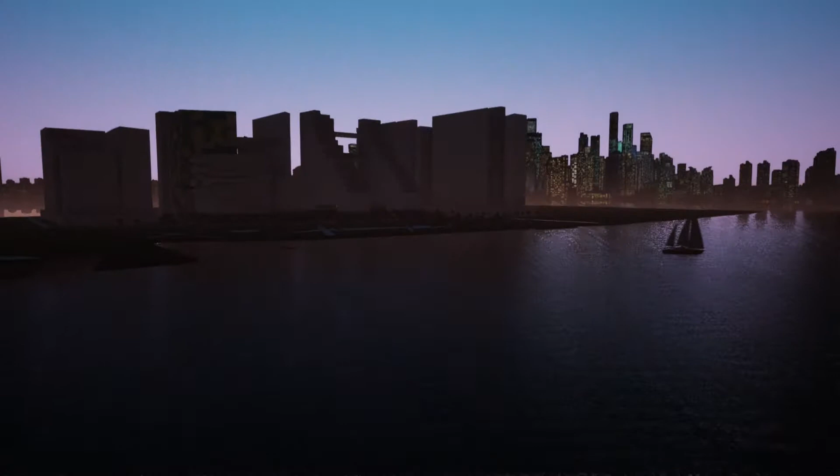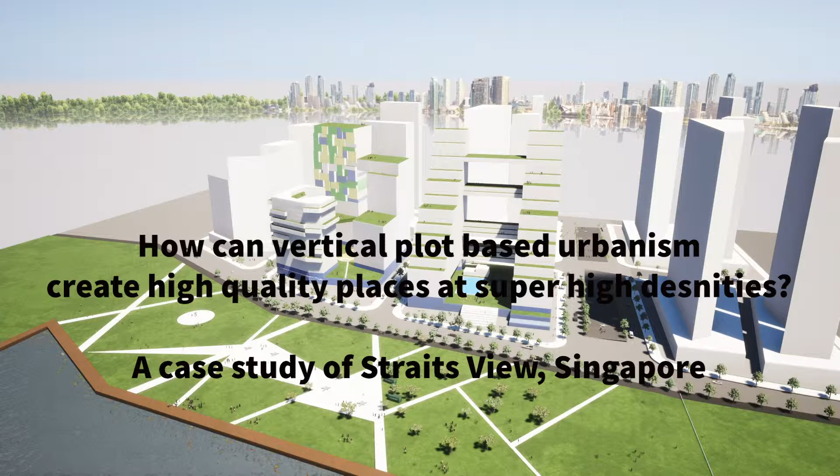This Issues 2 project seeks to investigate the possibility of implementing principles of plot-based urbanism in a vertically developing environment, which is of high density. The project follows on from the conceptual master plan developed in the Issues 1 module for a site located in southern Singapore.

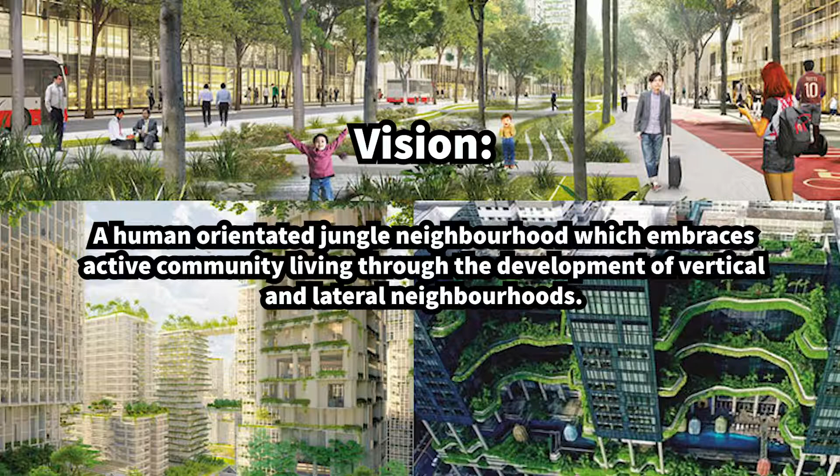The vision for the proposed development is to create a human-orientated jungle neighbourhood which embraces active community living through the development of vertical and lateral neighbourhoods. Four design objectives will be followed in order to achieve the vision.

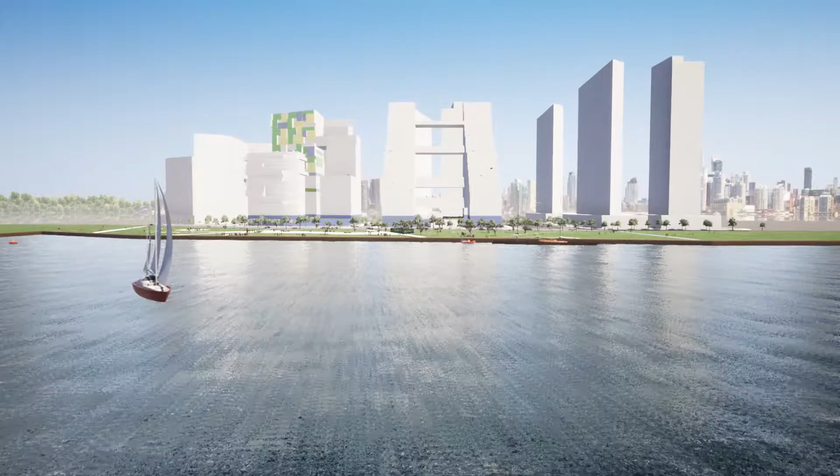Terminal Point is strategically located adjacent to Marina Bay Ferry and Cruise Ship Terminal and benefits from sea views across Singapore Straits. Capitalising on these key assets, the development is proposed as the new gateway to Singapore, with an attractive live, work, play environment integrated with efficient transport and quality infrastructure. With this in mind, it has been designed in the spirit of contemporary Singaporean urban development.

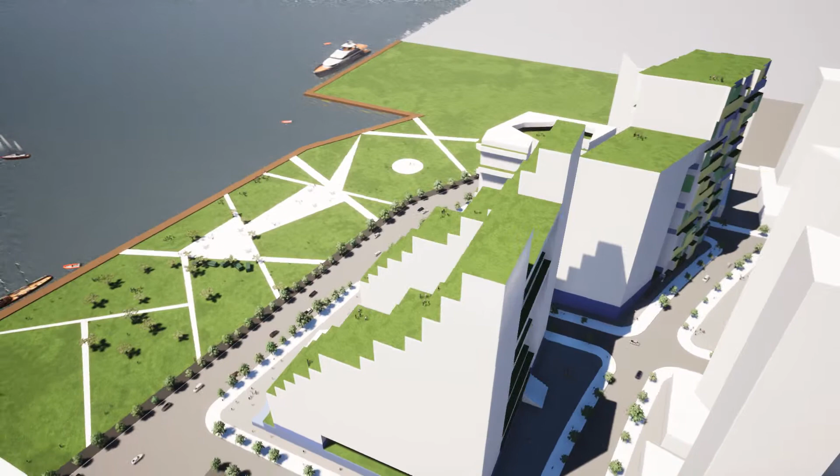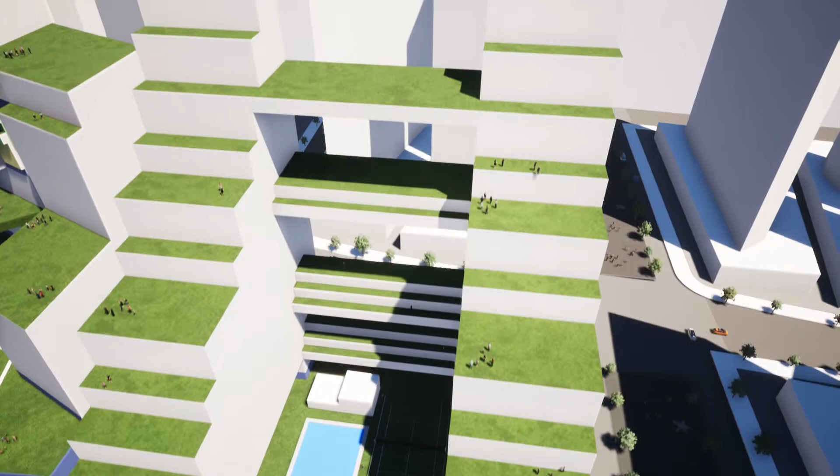Blocks are characterised by vertical stepped terraces and hanging gardens, which have been designed to take advantage of nearby sea views. Where sea views are not possible, units have courtyard views looking down across the podium courtyard spaces.

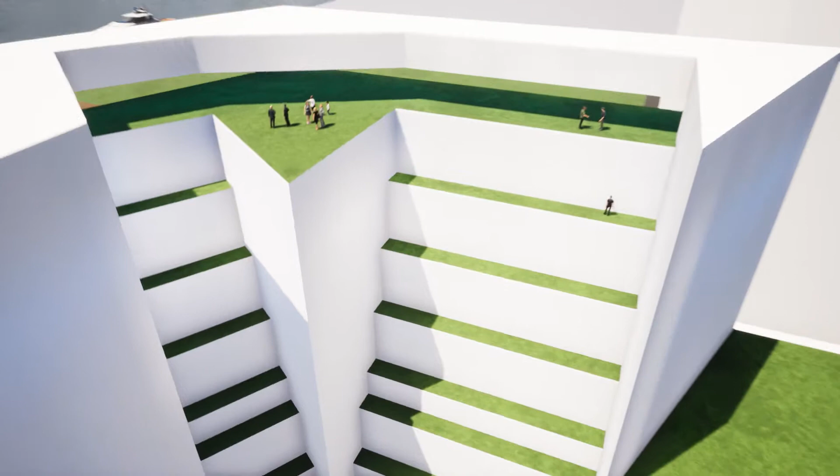Areas of the development are modular in form and allow for and encourage the personal customisation of units. This allows for adaptability and flexibility of use in changing economies, enhancing the scheme's longevity and sustainability.

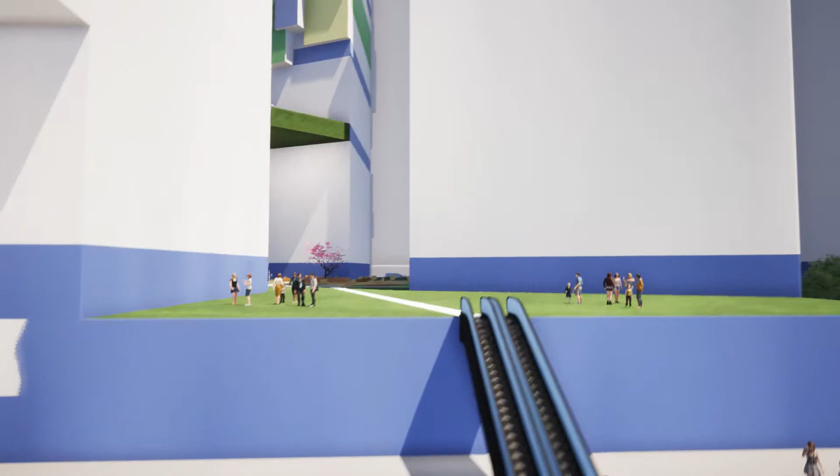Frequent community social spaces are provided in the form of podium and sky gardens. These spaces are flexible and allow residents to gather and socialise at ground, podium and rooftop levels.

The East Block provides residents with a sports and social area, located on the podium terrace. This encourages social engagement and active living whilst promoting the area as a community hub. Nearby Terminal Park provides residents, visitors and tourists with a large communal space for socialising, exercising and entertaining.

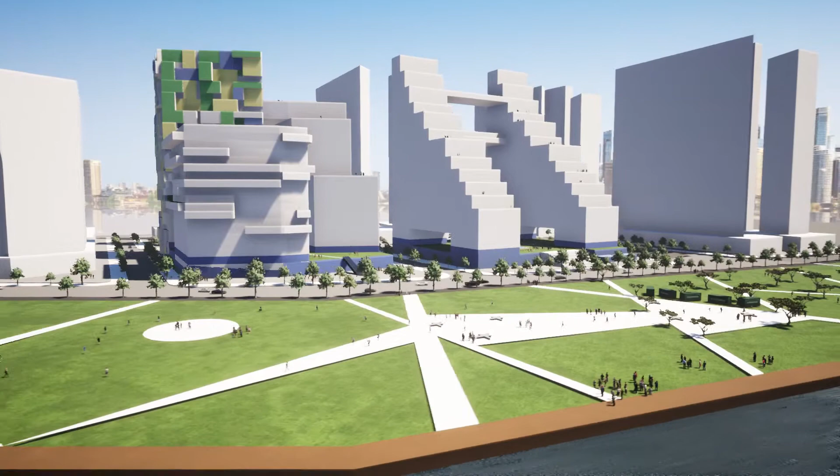Block form was considered in light of prevailing winds and enhancing sea views across Singapore Straits. In order to ensure block size promotes walkability and active modes of travel, block sizes have been kept to no more than 100 metres in width.

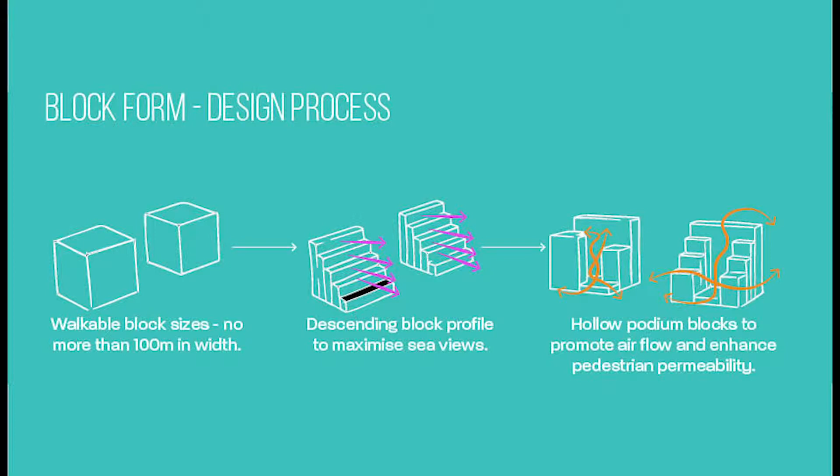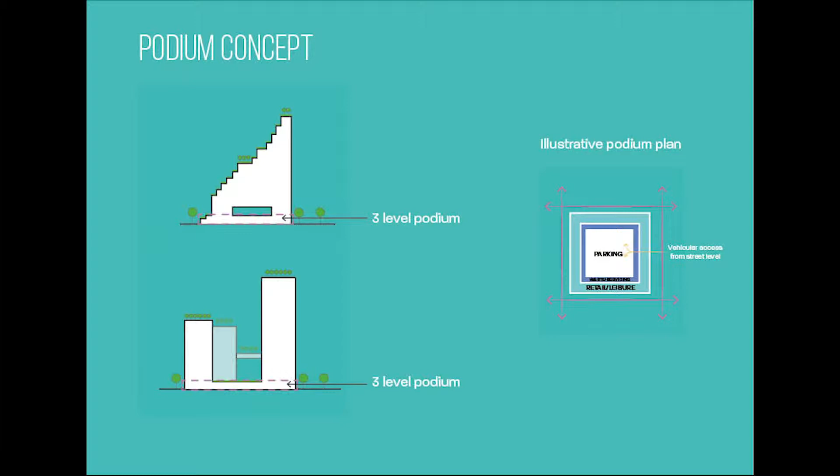Three-storey podium-style developments typical of Singapore are used to provide space for parking, servicing and waste services, wrapped by commercial and retail uses on the outside of the podium. These extensive podium spaces are key to accommodating an evolving mix of uses.

The porous ground floors, courtyards and through-block pedestrian links create generous public spaces that encourage interaction, networking and a lively public realm. The nature of the blocks add a distinct variation to the skyline and aid the legibility of the area and enhance the vertical townscape of the development.

One-bedroom up to 4-bed and penthouse residential units are proposed within the blocks. By their nature, they are flexible in terms of structure, however each apartment typology has a standardised floor area to follow. These drawings show illustrative plot prototypes for each of the proposed plot types.

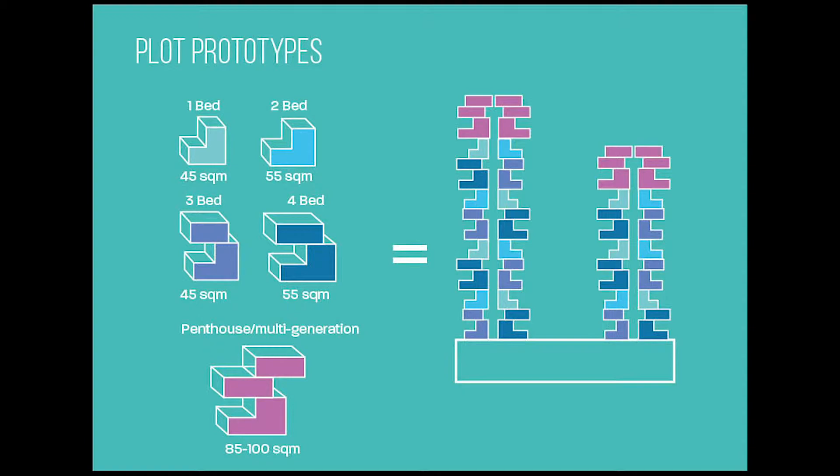Vertically stacked plots allow for a new type of living typology for Singapore. Stacked plot typologies allow for the easy provision of private outdoor spaces for residents to enjoy, where possible. Plots are to be arranged vertically around internal movement and connectivity zones, which double up as community spaces.

As the scheme fully embraces a contemporary mixed-use district, a range of uses are incorporated into each of the blocks. At ground level, up to 4th storey, blocks are characterised by retail and leisure uses. This will capitalise on footfall from tourists moving between the nearby ferry and cruise ship terminals through to downtown Singapore.

Retail and leisure uses at the ground floor and lower level will ensure streets are activated at all times of day, embracing a 24-hour economy.

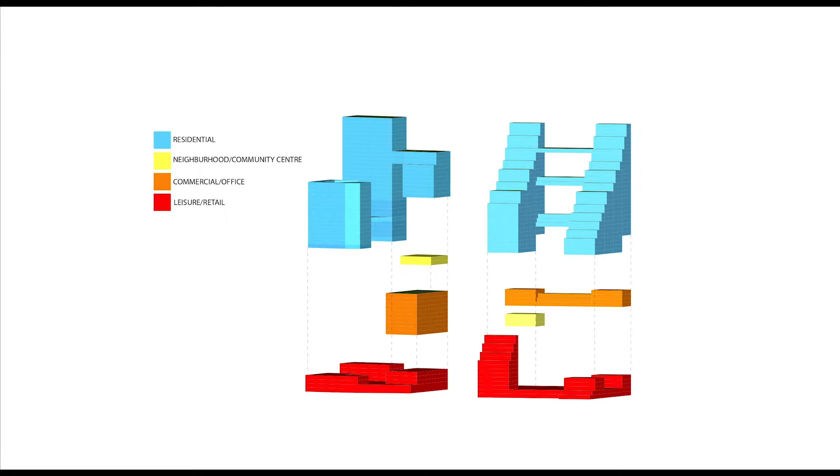The blocks include a small proportion of commercial and office units, generally located to the north side of the blocks. This is to ensure a truly mixed-use destination, somewhere for residents to live, work and play.

Podiums are accessed from street level via outdoor escalators and stairways, and also lifts, to ensure accessibility for all. Access points are located where possible on all sides of the block to ensure maximum permeability by foot to further promote a walkable district.

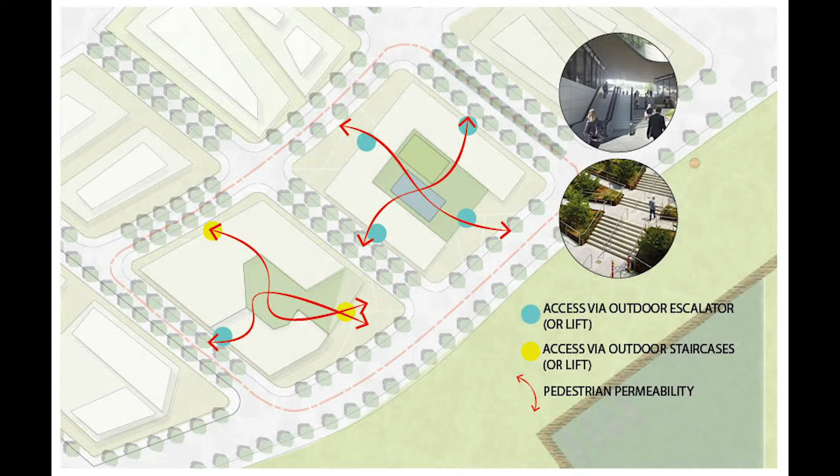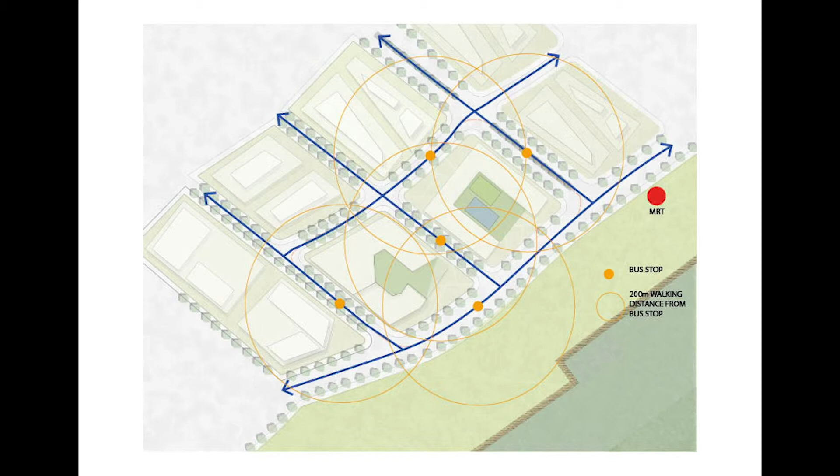Terminal Point has ambitious car-light plans, with more space dedicated to pedestrians, cyclists and public transport. The district will be well connected internally and to the rest of the city. Nearby MRT lines and bus routes, facilitated by bus-only corridors, will form the backbone of the system. Each development will be no more than 3 to 5 minutes' walk from the MRT station or bus stop.

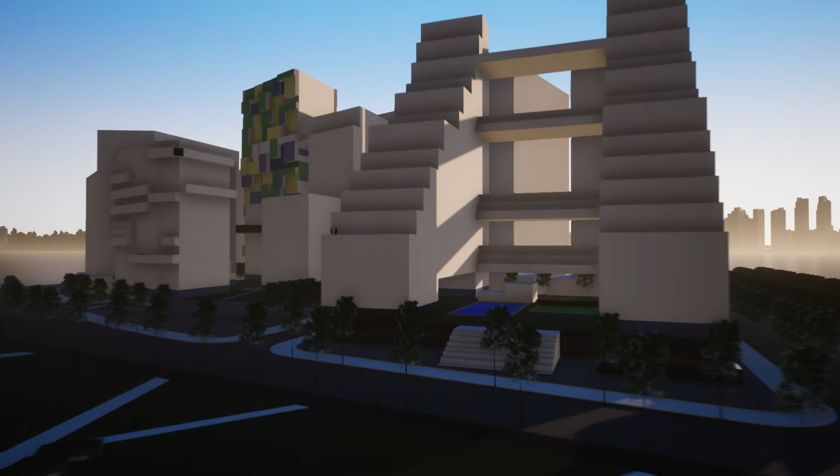The green and blue network is provided in the form of public podium gardens, sky gardens, stepped terraces, hanging gardens and private balconies.

Green streets create a network of green corridors strung throughout the development, which link with the wider master plan through to downtown Singapore and Gardens by the Bay. Straits Boulevard is located to the northeast of the site, offering a green connection corridor through to the city.